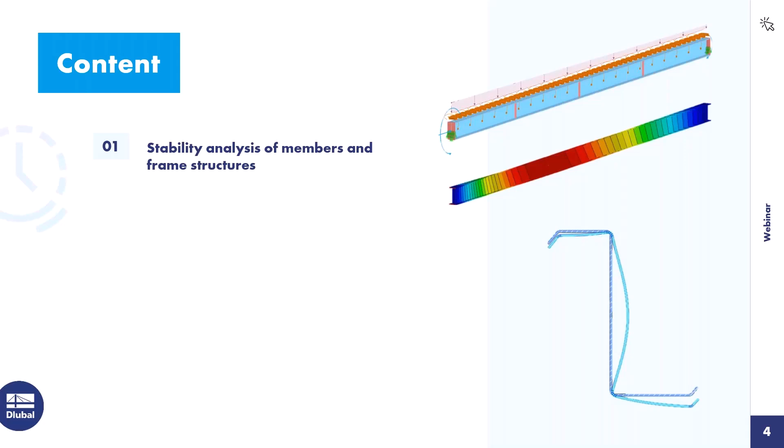First I want to focus on the stability analysis of members and frame structures. In the second step, I want to go to the stability analysis on a cross-section level using the finite strip method. Then I want to show you how the buckling analysis is integrated in the Steel Joints add-on. And lastly, I want to show you how we can use the Structure Stability add-on for troubleshooting of instabilities, how we can leverage it for that purpose.

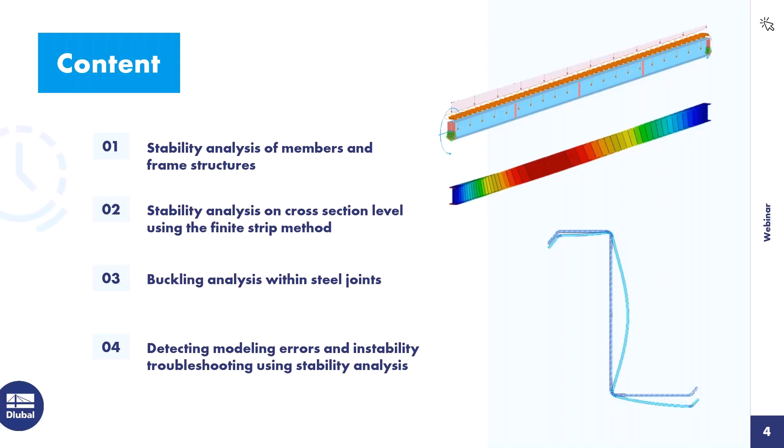Before we jump into the first model, I want to give you a brief introduction and explain at least a few points that are related to the stability analysis and how we perform it in RFEM 6. So what elements or structures are we taking care of with this analysis method? It's usually slender members and structures under compression that tend to become unstable, where the slenderness of a member or a structure is not only defined by its dimensions. The greater the length compared to the cross-sectional dimensions, the more slender and prone to instabilities it is, but it's also related to material properties.

So if I have a material that has high strength and low stiffness, then it's more likely that stability failure will be the critical design element as opposed to cross-sectional failure. And then lastly, the boundary conditions, of course, play a major role. If I have rotational restraints or lateral restraints for our member, it's not that likely to become unstable.

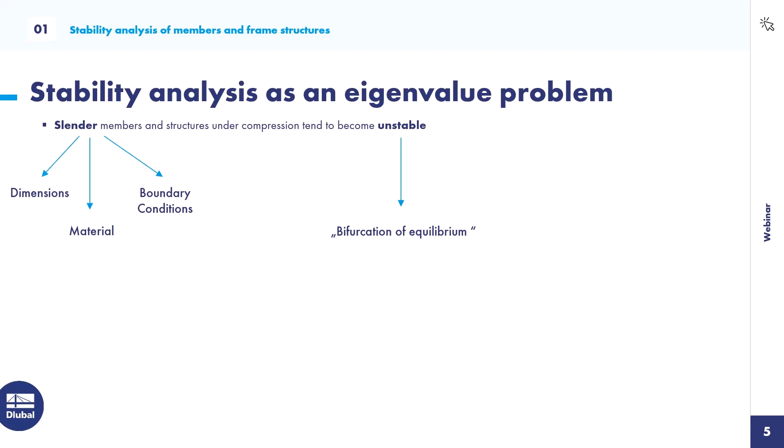And what do I mean with unstable? When we reach the unstable state, we have no clear state of equilibrium. We have instead a bifurcation of equilibrium, so there are multiple paths that the structure may follow. That's why this linear stability analysis is often referred to as a linear bifurcation analysis, or LBA. I might use that abbreviation along this webinar as well. And the critical load may also sometimes be named bifurcation load.

Using the FEM, the ideal bifurcation load can be determined solving a conventional eigenvalue problem. So we can set that up and solve that. In that context, what does ideal mean? It means for the stability analysis that we treat the structure as linear. So we assume a fully linear structure behavior and a perfect geometry. So the base geometry of our model is used in this stability analysis.

The eigenvalue problem in the general formulation has two symmetric matrices, A and B, the eigenvalues lambda and the respective eigenvectors x. And to solve for the unknown eigenvalues lambda, we have to set the first term of our formula to 0, and that's mostly done by calculating the determinant of this first part in the bracket and setting it to 0. And we have multiple numerical tools or solvers to do that determinant determination.

And in our specific case, in the stability analysis, our two symmetric matrices are represented by the linear stiffness matrix and the geometric stiffness matrix. The geometric stiffness matrix is dependent on the loading conditions. That's also why, before we can solve a stability analysis, we need to perform a structural analysis to determine the internal forces in the system and to determine the entries in the geometric stiffness matrix.

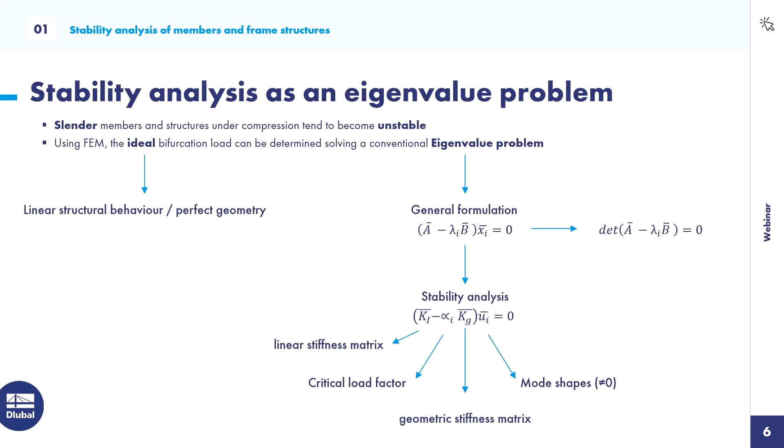We want to start with some fundamental solutions that are very well known amongst civil engineers. Euler already in the 18th century provided some simple analytic solutions for prismatic members under pure compression. They are well known as the Euler cases. I have listed the 4 fundamental cases here with the analytical formulas to calculate the bifurcation load or the critical load.

In the first step, I want to go into our program now and try to simulate an Euler case 2 and make a small comparison if we can evaluate the correct critical load according to Euler and what else we can get from our structural stability analysis. So let's jump into the program. And as I said, I have prepared some smaller models for you. The first one is this simple Euler case.

I have an HEB 300 beam with a length of 5 meters, and I applied a unit load of 1 kilonewton that sets the member under compression. In order to perform a stability analysis with our add-on structural stability, I need to first activate it, and I can find it in the base data of the model. I activate the respective add-on here, which you can find under analysis add-ons, click OK.

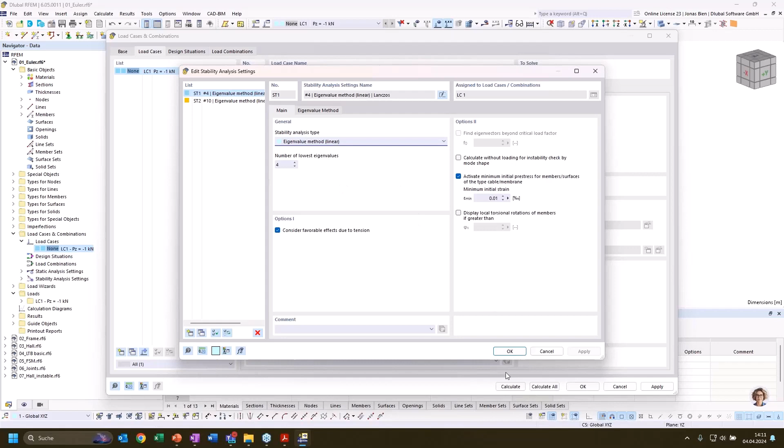And then we have these multiple solver variants to solve the determinant of our eigenvalue problem. But the default solver should mostly suit us for this problem. There might be cases where you have subsystems that are not connected to each other. Then this default solver will throw an error and suggest another solver variant.

But with these default settings, I can just run the load case, and now the first thing the program is doing is that it solves the static analysis, and then it solves the stability analysis. And when I have performed the stability analysis, I not only get the results for the static analysis, but I can also switch to the stability analysis results by this drop-down menu here.

Okay, so what do we see here? First of all, we get a drop-down menu here in the upper left corner, and also in the table we can see that we have these 4 mode shapes calculated with a respective critical load factor.

This represents the factor which I can multiply the external load with until my system would collapse due to instability. So if I would increase the unit load of 1 kilonewton up here up to 7,035 kilonewton and run a second order analysis, my system would become unstable and I would get an error message telling me that. So I can read these critical load factors here.

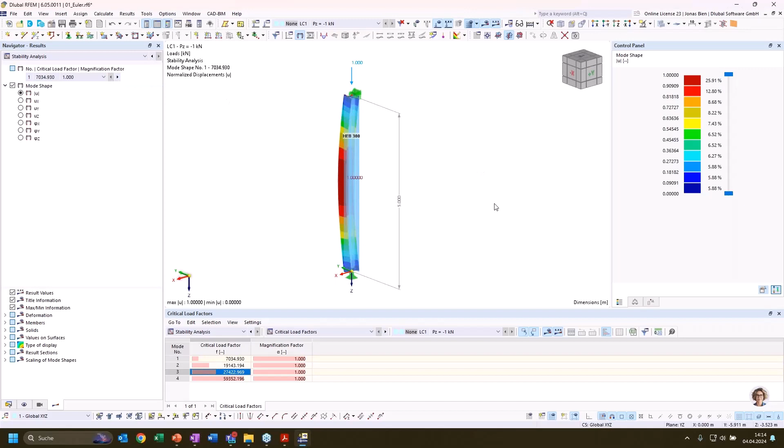Okay, so we can go through the 4 eigenmodes here by clicking the table entries, or also go through the entries in the drop-down menu. And we can see the first eigenmode that is presented to us would resemble buckling of our I-beam around its weak axis. And it's doing that in a symmetric way. We have a simply supported beam here, so that looks as expected.

Then the second mode shape would be buckling around the strong axis. And the third and fourth eigenmode are some multi-wave eigenmodes for buckling around the weak axis. These are mostly not very interesting for us, so usually only the mode shape with the lowest critical load factor is of interest for us.

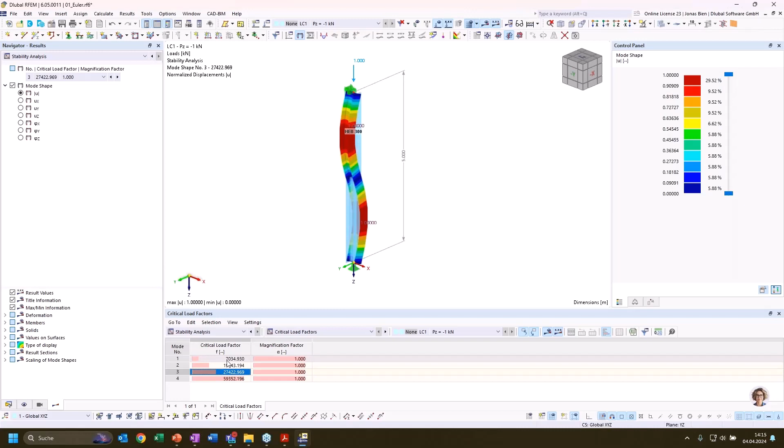And I want to now compare the critical load factor that we have calculated here with the critical ideal Euler load that we have for our Euler case 2. Just so that you remember, we could calculate it just using this formula, pi to the power of 2 times the Young's modulus times the moment of inertia of our section, divided by the effective buckling length. In this case, it would be the length of our member times 1, to the power of 2.

And I could do that using my calculator, but then I would need to look up all the values for my section, the member length, the material properties, and so on. So I want to show you an alternative solution. We can also use the in-app console that we can open via the toolbar. And in here, I can reference all the objects that I have in my model.

For example, I could reference my material number 1 by typing this and then typing a dot, and then I see all the properties that I can ask this object for. For example, I would find the elastic modulus here, and if I press enter, then I get as an output the elastic modulus of our material number 1 in SI units. So that's important. And of course, I can do some more complex calculations here.

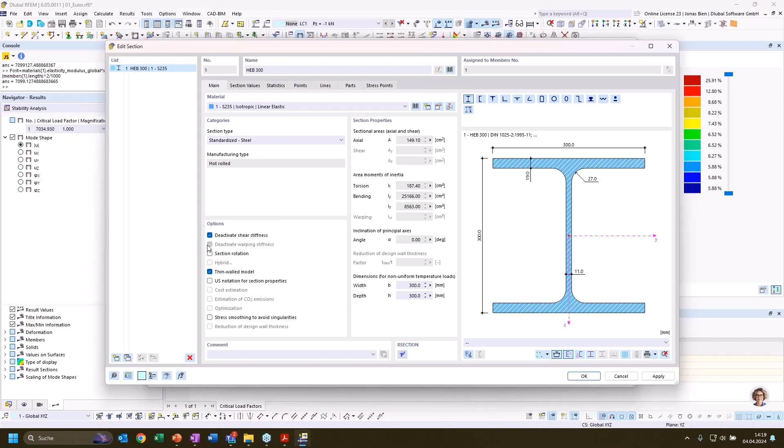And the difference comes from an effect that we take into account in our calculation with the finite element method, which is the shear stiffness of the section that was neglected by Euler.

So if we want to compare values, we can manually deactivate the shear stiffness for our section in RFEM and do the calculation again and see what our critical load factor would now be. And if I again go to the results, we now see that our critical load factor is much closer to the ideal Euler load.

It's really, it compares very, very well. So we could, of course, also calculate the critical load for buckling around the strong axis. We just need to swap the Z with a Y value, and we have the moment of inertia about the strong axis, and also this value is quite satisfying with regards to our result that we received from the structural stability add-on. So that compares quite well. We've, as we expected, met the results of the analytical formula.

Okay, now that that's set and we are confident that our solution here provides reasonable values, I want to show you another important result of our stability analysis when it comes to member results. Because it's often used for the later design of the column, if we, for example, would take a classic approach to design this steel column using an equivalent member method, we would need the effective buckling length. And we can use the structural stability add-on to calculate the effective buckling length for this equivalent member method.

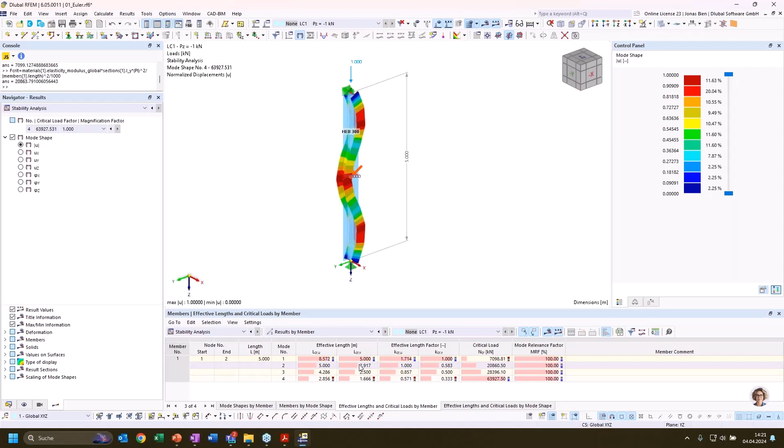Therefore, we just go to the results by member tab in the table and go to effective length and critical loads by member, or the last tab also has these effective length values included. And now we see for each mode shape, we have effective length given for both main directions. U represents the strong axis, while V represents the weak axis. It's like Y comes before Z and U comes before V. That's one way to keep it in mind. But now we have for the first mode shape two effective lengths for both axes.

And I want to explain what is done in the background. It's nothing else than taking the critical load formula from Euler for case number 2 and recomposing it or evaluating it for L, with beta being the buckling length coefficient and beta times the system length being L critical, so the critical buckling length. And when we know what our F critical is, so the critical buckling load, then we can evaluate the critical buckling length. And of course, when we divide it by the system length, we can evaluate the buckling length coefficient beta as well. And that's what is done here in the background.

The critical load of the member is just the normal force, or the actual force in the member, times the critical load factor. And from this F crit, our effective length is calculated, and then the effective length factor is calculated. And we can do that as well using our console. So we can also plug in this reassembled formula here as well. So I have L crit and I have here F crit. So that would be the parameter for our critical load.

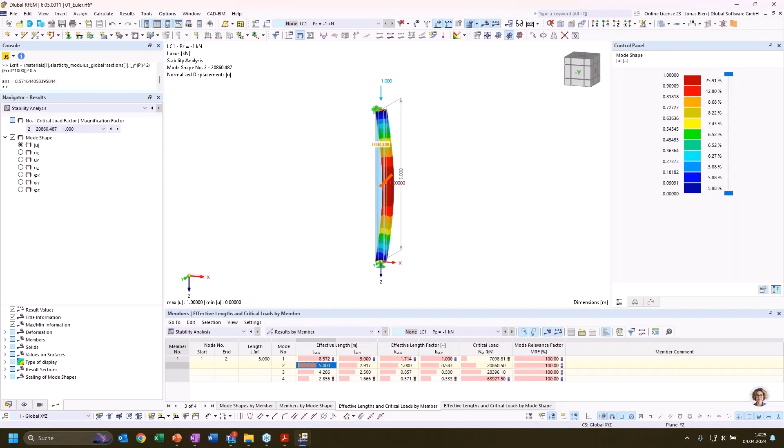So I can demonstrate that simply by again evaluating the L crit formula, but instead of taking the z moment of inertia for the weak axis, I put in the moment of inertia for the strong axis, and I receive this value of 8.57 meters, but it wouldn't correspond to the relevant buckling length of our system for buckling around the strong axis. So this is very important to keep in mind when using these effective lengths for the stability design.

Then one thing I want to show: we can directly import these buckling lengths into our design add-on. So if I want to design this column here with our steel design add-on, and I want to do it with the equivalent member method, I have to assign these effective lengths. And here I have the option to import the buckling length from the stability analysis.

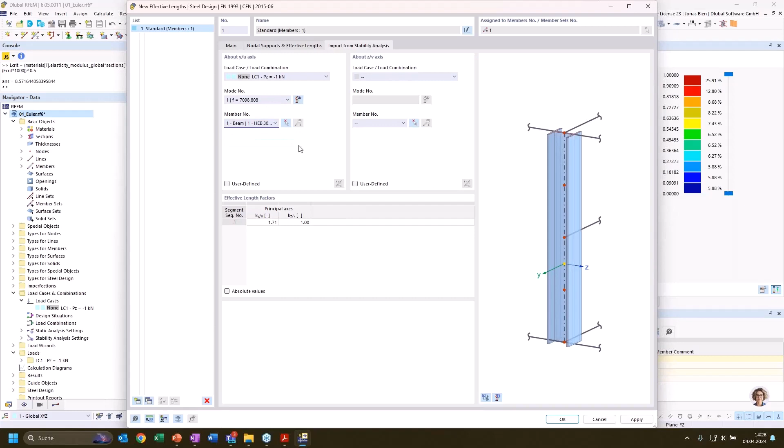And if I click this, we get another tab where I can enter the load case and the mode shape and the member number. And now it would take this buckling length coefficient from mode number 1 for beam number 1 and evaluate the effective buckling factor and use it for the design.

In this case, we have to take care that buckling around the strong axis is observed in mode shape number 2. So we would need to enter mode shape number 2 here, and mode shape number 1 would be for the buckling length coefficient for buckling around the weak axis. So that would fit and suit our expectations.

Of course, we can do that for more complex systems as well. We just have to keep in mind that when we have a more complex system and we change something, then the order of the mode shapes can also change. They are always sorted for the lowest eigenvalue or the lowest critical load factor. So the mode shape with the lowest critical load factor is always mode number 1.

And if we change something in our system, it can happen that this sorting changes, but these entries then need to be checked again because they don't know how to adapt to the changed model. So we would do that manually. That we need to always keep in mind. So sometimes it's just better to do the stability analysis and then manually put in the buckling length coefficients here, and we don't need to make any thoughts about it anymore.

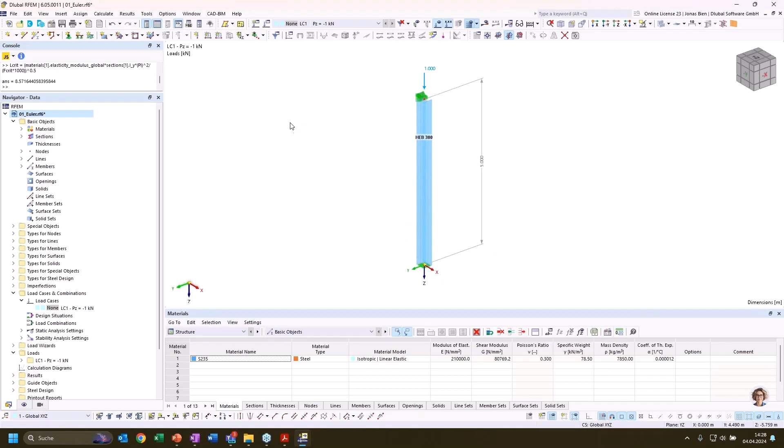All right, but that's not what I want to focus on now. I want to show you instead how the buckling length coefficients change or adapt when I adjust the statical system. So when I, for example, take a rigid boundary condition at the bottom of this column, it should now calculate a lower buckling length coefficient because now the system resembles Euler case number 3. And we know that here we would expect a buckling length coefficient of 0.7.

And that's exactly what we get for the first mode shape for the weak axis and the second mode shape for the strong axis in this case. Then, for these cases, of course, why should I use my add-on here? Because these cases are known. I can just apply the Euler formula and calculate my buckling length.

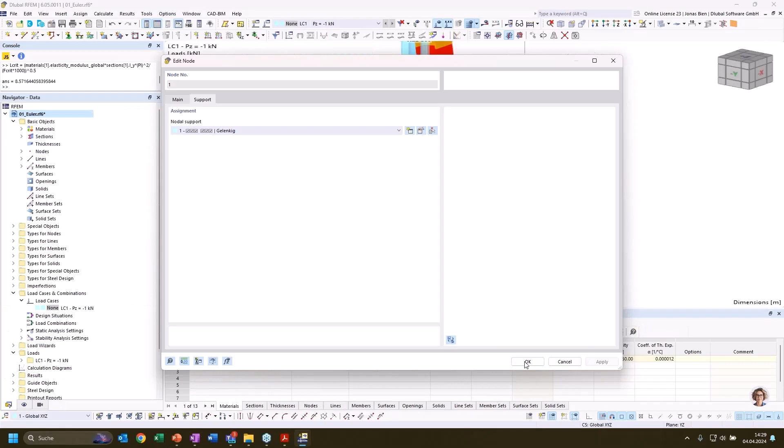But what if we have a certain spring stiffness here, which means that I'm with the stiffness somewhere between Euler case number 2 and Euler case number 3. And here it's not so obvious what the buckling length for our equivalent member check would be. Of course, we could look into textbooks that have these cases covered, but also here we can use the structure stability analysis to evaluate the effective buckling length factor. And as we expected, it is between 1 and 0.7.

So everything's set. Because it's a linear analysis, it is interesting what the program does with nonlinearities. So, for example, if I apply some kind of nonlinear boundary conditions here, which at first glance don't look that nonlinear, because in this case I want to apply a stiffness diagram where I have the stiffness of our spring at the column bottom in relation to the vertical load, but as you can see, it should be constant, and no matter what the vertical load in the column is, the spring constant should always be constant.

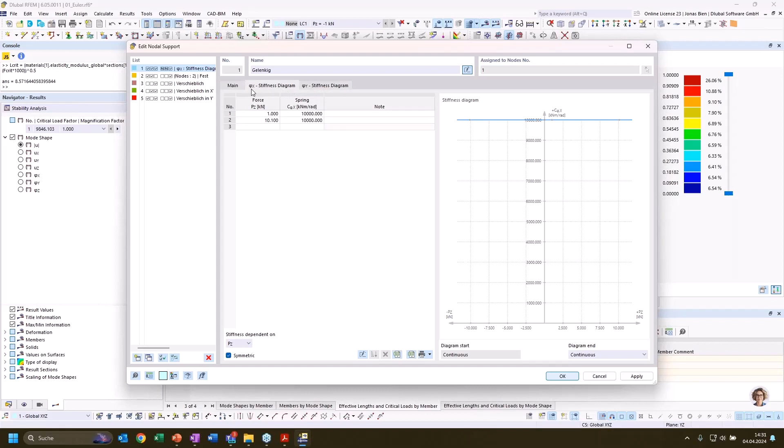So it doesn't look nonlinear at first glance, but we have to take into consideration that all these nonlinearities are ignored in the structural stability analysis. So I want to just demonstrate this. Although we have set this nonlinear spring stiffness at the bottom, we get as a result Euler case 2, where a pure hinge is assumed at the bottom. So when it comes to the supports, only these entries are taken into consideration for the structural stability analysis.

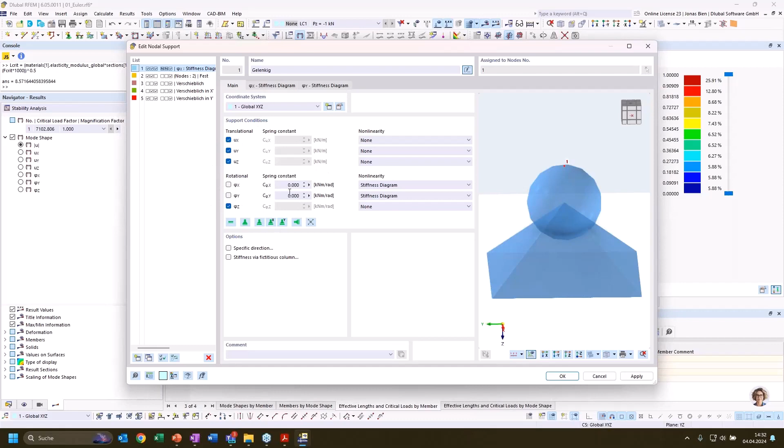All right. Of course, when we are working with other nonlinear elements such as tension rods or buckling members, then these are taken into consideration or not according to their state in the static analysis. So if we have a tension member that is under tension, it will be taken into consideration in the structural stability analysis as well, and vice versa.

Okay, then one last thing to finish this simple example here. Let's delete this nonlinearity and see what happens if we divide this member in half.

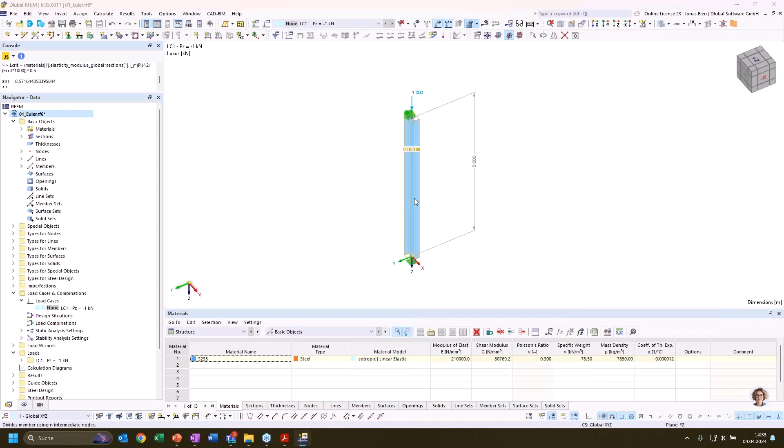I just introduce an intermediate node and divide this one column into 2 separate members, and again run the structural stability analysis.

So now we have two members, but the effective length for each member is still 5 meters, and that's what is expected when we again look at the formula for the calculation of our critical buckling length, because the Young's modulus, or the moment of inertia, they have not changed, and also the critical load factor has not changed.

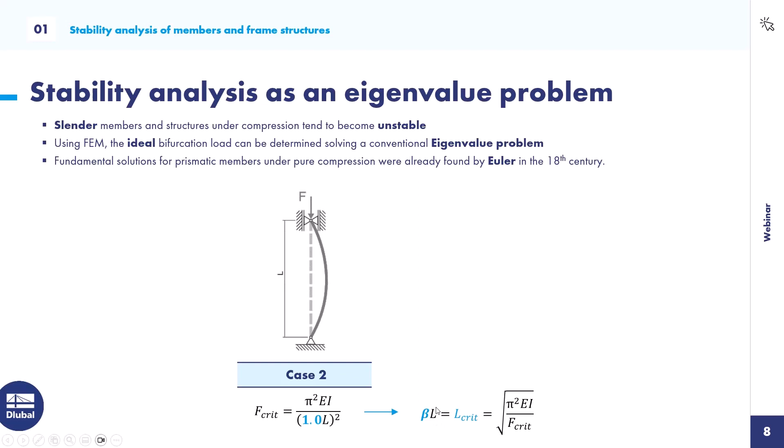The only thing that changed is our reference length L for the member. It's divided in half, and that is only visible in the buckling length coefficient, which is now 2 instead of 1 for each of the members. So we could still use this effective length factor for the stability design within steel design, or some design add-on. It would still be valid.

Okay, now let's increase the complexity a bit. So what if we have more than one member in our model? In this case, we have a 2D model of a 2-hinged frame with an additional column number 5, that is just connected to this 2-hinged frame by a truss member.

So this is basically a simply supported column, just as we have seen it before, which leans toward this 2-hinged frame, or is supported by the 2-hinged frame at the column head. All 3 columns, member number 1, 3, and 5, are loaded with a load of 1000 kilonewton in compression.

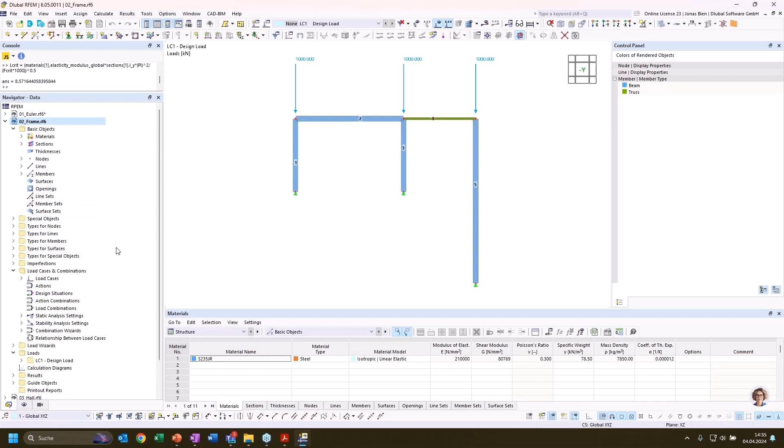Now let's perform a stability analysis for this load case as well. It should be all set for this analysis, same settings as we have used them before for the Euler case. And accordingly, we also get 4 mode shapes for our structure.

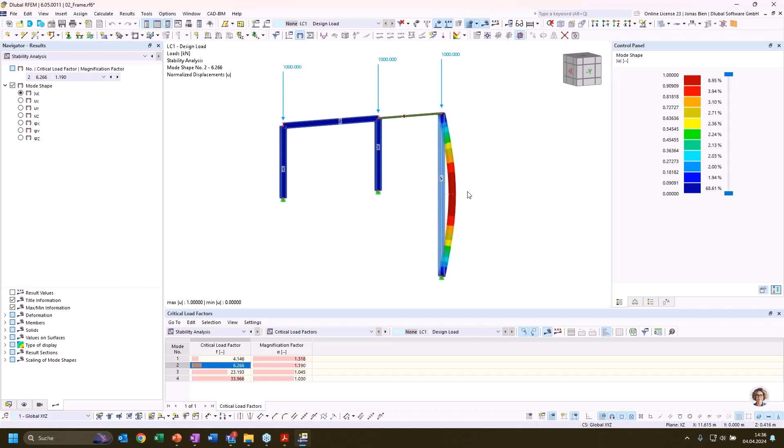I want to quickly browse through these mode shapes together with you. So the first one is some asymmetric lateral deformation of the 2-hinged frame, and also this connected pinned column is also moving with the 2-hinged frame. Then the second mode shape would represent buckling of the longer column with the pin supports around the strong axis. The rest of the structure does not seem to have any deformation.

And the third would also be a higher mode of this pinned member number 5. And mode shape number 4 would resemble a symmetric buckling mode of the 2-hinged frame without any participation of the simply supported column here at the side.

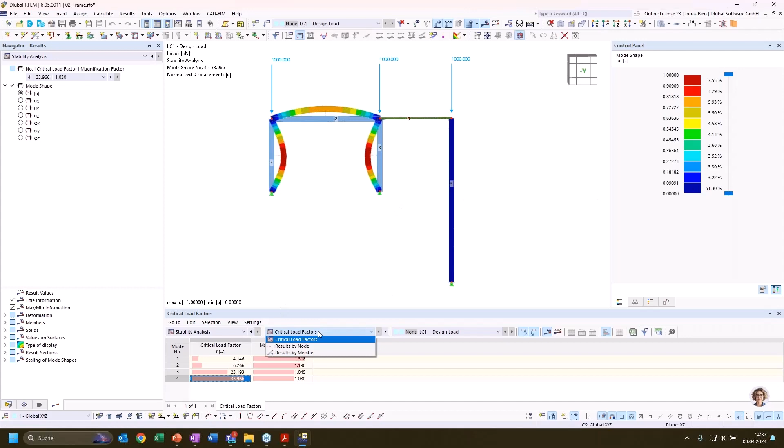So if we want to now extract the effective length, for example, for the columns of the 2-hinged frame, we can again go to the member results of the stability analysis and check the effective length by member, and I can then click on one of those members, and I will automatically be routed to the respective table entries.

And now in the first mode shape, as we have seen, this 2-hinged frame suffers from buckling around the strong axis, and we could read the effective length factor accordingly for the strong axis in this column. So we would get an effective buckling factor of 2.8, which is also in the realm of the expected results for such 2-hinged frames.

If we now neglect this simply supported column here at the side, we would expect some effective buckling factor higher than 2, and the exact value would be influenced by the stiffness of the girder and the columns, and of course the length and so on. Now with the additional column, it's also influenced by that. So that would be quite clear.

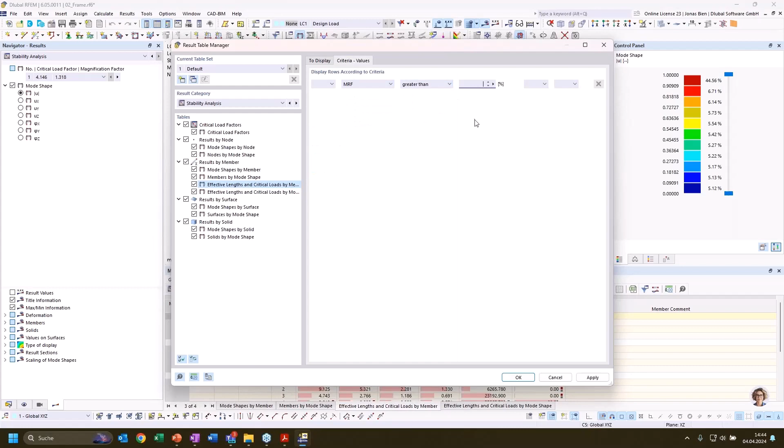For example, for the determination of effective length factors, I would go the other way around. When I'm interested in the relevant buckling factor for column number 1, I would go through the modes that I have calculated and only take into consideration the mode shapes that have a mode relevance factor that is significant, and read my buckling length factor from the mode that has the lowest critical load factor. In that case, I would definitely take the value of 2.8 for column number 1 and also for column number 3.

But I want to show you in the next step how we could also leverage this tool in a more realistic setting, or how to approach the buckling length determination in a more realistic model. So here we have an industrial hall. We have a lot of different load cases here that of course would give us probably about 100 or 200 load combinations. Of course, in some applications, we can have a lot more load combinations. And then the question is which load combination is most severe for buckling for a specific member.

And I have now, for this case, deliberately started with result combinations, because sometimes, for example, when I want to design bridges or so, I may have 10,000 load combinations, and it's not possible to calculate all 10,000 load combinations and assess them for stability. So what I would recommend, if you have too many result combinations to handle in one model - here it would still be feasible and no problem, but if you have additional load cases, that can be a problem.

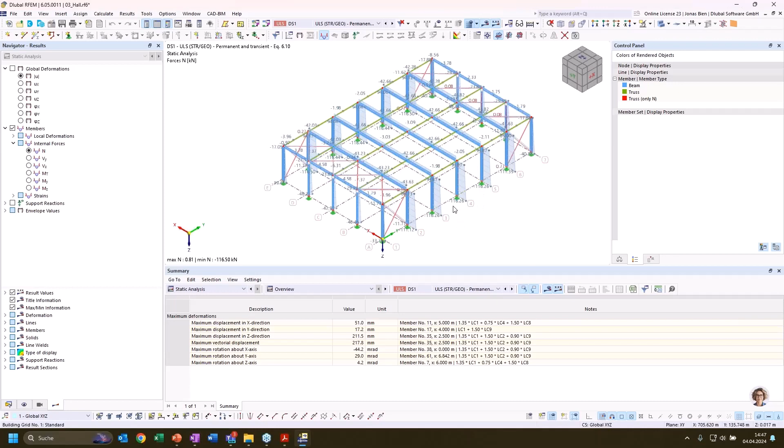I can find those if I go to the static analysis results for this design situation, go to results by members, internal forces, and stick to this middle column here. I click the column and get in this result combination all extreme internal forces for this member. So for example, I get the combination with the highest or lowest axial load, including the sign. The same is printed out for the highest shear force in Y direction, highest shear force in Z direction, lowest shear force, and so on. But since we're interested in buckling, I'd look at the combination that gives the highest compressive load, which is this one here with minus 116 kilonewton. In the last column, I'd have the loading or load combination that leads to this axial load.

Now from the result combination, I can just right-click this combination to generate a load combination from this table. For this load combination, which I feel could be the most relevant for buckling of our columns, I can now perform an eigenvalue analysis, a linear stability analysis, by just activating it here and calculating it. So now I specifically run the stability analysis for just this one load combination that I generated from the envelope.

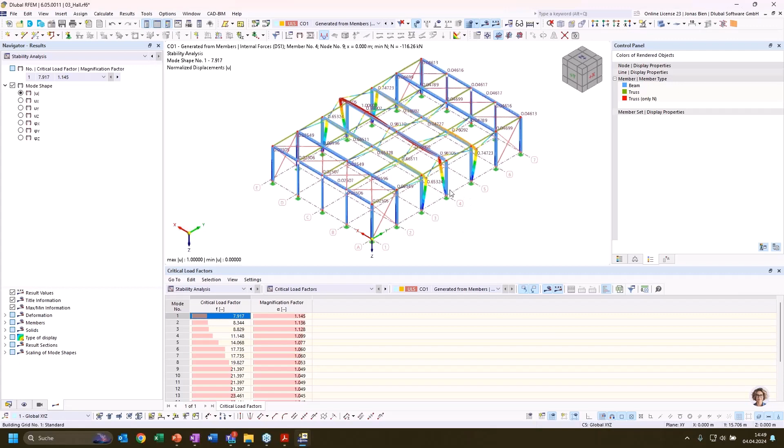Now the second question, after sorting out which design situation could be relevant: I'd have to figure out which mode shape is most relevant for determining my buckling length for this column. So again, I have 20 critical load factors and mode shapes, and I can browse through them. I see some involve deformation or buckling of the frame where this column is involved. Some are only isolated buckling of those columns, or some compressive member in the roof. These wouldn't really interest me.

In order to filter these out, I can again use the mode relevance factor. I go to the table effective length and critical length by members, click on my member number 4, and get the whole table. I get the mode relevance factor for all 20 mode shapes calculated, and I see that only in 2 of these mode shapes is my column member really participating. So these would be the only 2 mode shapes suitable for extracting the buckling length. I could, of course, apply the filter to make it more accessible.

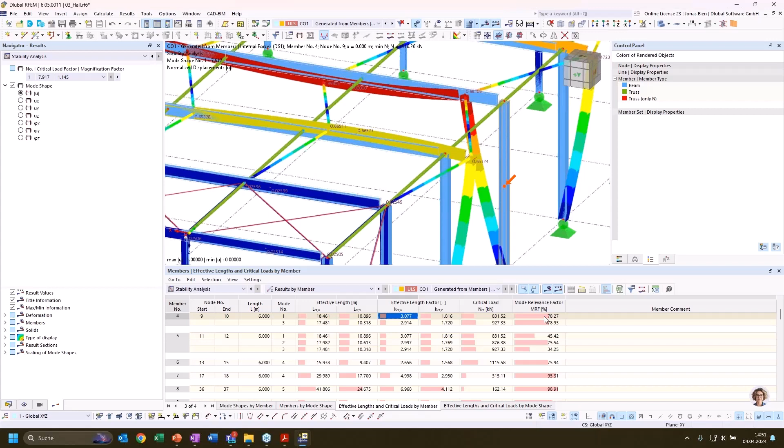Then I'd again follow the rule from the last smaller example: take the mode that has the lowest critical load with a significant mode relevance factor, and take the effective length factor for buckling around the strong axis from this mode shape. So this is how the mode relevance factor can help you assess the relevant mode shapes for a particular member design.

That's what I wanted to show you on this model. Now I want to take the next step and highlight something you may have noticed so far. We have only discussed flexural buckling of members, but especially in steel structures, other stability modes can also govern the stability design of these members, namely torsional buckling or flexural torsional or lateral torsional buckling. We can also take those into consideration with our structural stability add-on, but we need to activate warping torsion in order to detect those stability modes.

I want to make another small example where we investigate the lateral torsional buckling of a simple system, where again, as in the first Euler case, we know the exact solution, and I want to first compare the values we get from RFEM with the analytical value. So in order to perform a structural stability analysis where we can also consider lateral torsional buckling, we would, in addition to the structural stability add-on, also require the torsional warping add-on.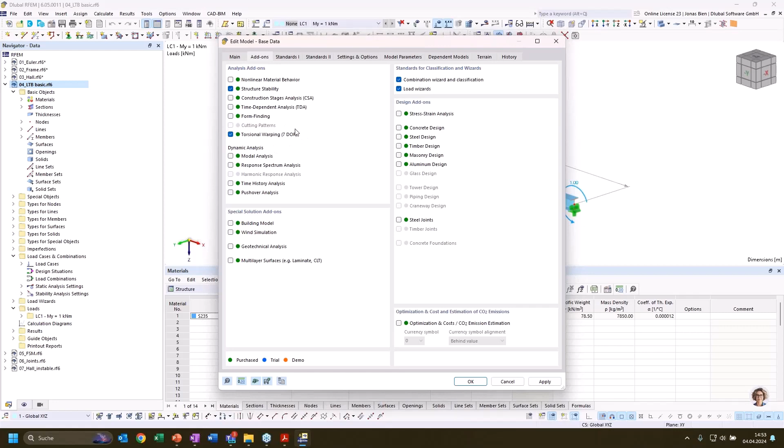And as soon as we activate the 7th degree of freedom, this would be directly included in the stability analysis, or would be taken into account. And I have now this simply supported member here, it's an HEB 300 again, with a length of 10 meters and a constant bending moment.

I could again run the stability analysis, and now we wouldn't get any flexural buckling modes for this member at all because we have no compression in it, but I didn't activate the structural stability analysis for this particular load case, so I will just do that. And now we should get a lateral torsional buckling mode.

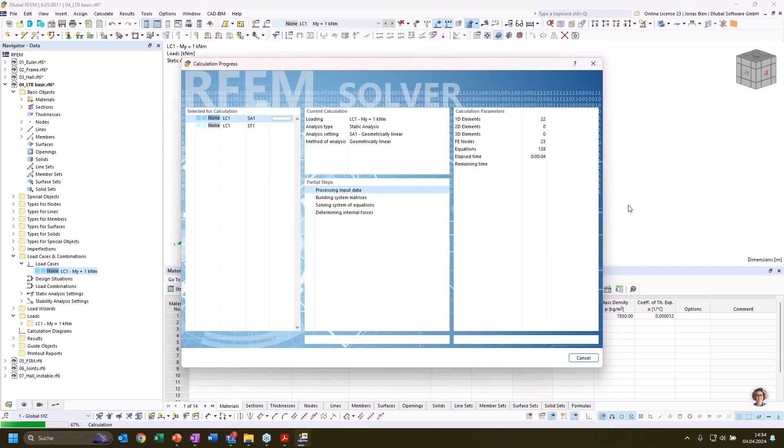When we switch to the results of the stability analysis, we can now see very clearly this characteristic deformation of our member. It tilts and at the same time moves in the direction of the weak axis. And again, we get a critical load factor. And this one we can compare with the analytical solution.

For this simple system, an analytical solution can be easily found in the textbooks. It was once also written down in some of the codes, for example, in the old German steel construction code DIN 18800. I think in some national annexes of the Eurocode 3, this formula is also given.

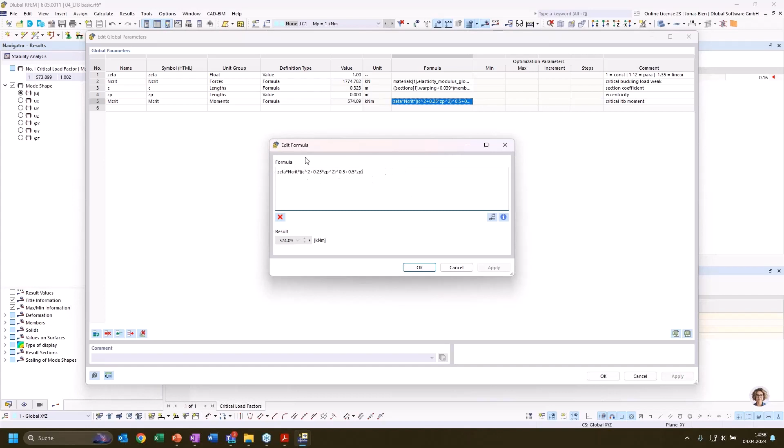But for our convenience, I already plugged this formula to calculate the critical bending moment for lateral torsional buckling into our global parameters. So instead of just using the console and typing in my commands to evaluate certain parameters or values, I can also use global formulas and global parameters to calculate something. For example, I have now created a formula for the evaluation of Mcrit, and we can look at what goes into it. Maybe this looks familiar to you.

So here we have a parameter that describes the moment distribution, which is zeta. It's 1 in this simple case with uniform bending. Then we have the elastic buckling load, Ncrit, the one that we already assessed in the first example. Then we have some parameter C that takes into account the warping and torsional stiffness of our section. And we have zP, which describes the eccentricity of the loading, which is in this case not important. And what we get from this formula is a critical bending moment of 574 kilonewton meter.

We could also use the console again to evaluate this. All the global parameters that we have stored, we can call here in our console. In this case, it's again written in SI units, so I would need to divide it by 1000 to get to kilonewton meter. And this is very close to the value that we evaluated with the Structure Stability add-on. So it works again quite well.

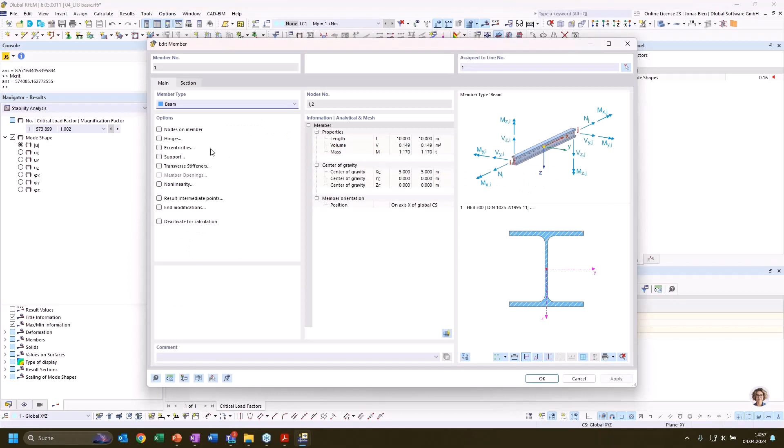But of course, as in the Euler case, we can use our Structure Stability add-on to investigate much more complex cases. For example, we could add a member support. So I go to the member and add a support, and then I get this tab where I can enter a member support. I could manually put in some rotational restraint. I could even apply an eccentricity of this member restraint, for example, a rotational restraint at the top of the flange.

And we can now also take into consideration shear panels and rotational restraints in the global analysis. They are entered as fictitious stiffness. You may know them from steel design, aluminum design or timber design, where you always had access to those restraints, but they were only considered in the design of the member, in the design add-on. But we can now use them in the global structural stability analysis as well.

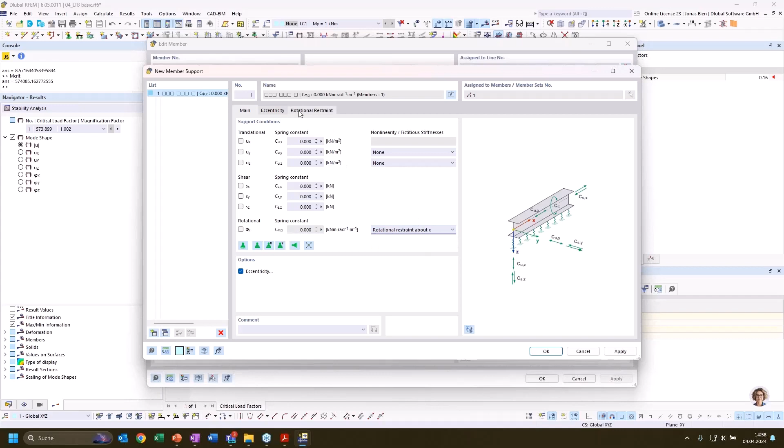So I could, for example, define a rotational restraint. For example, I want to consider some kind of sheeting that I have on top of my girder. I will now just take some more or less random settings, some sheeting just to get some stiffness. Of course, these values were accessible all the time, but now we can also use the stiffness that we define here in this global structural analysis.

And one thing that is also new, and I want to highlight to you, is that for the spring stiffness of the connection between the trapezoidal sheeting and our member, and also for the load introduced to the sheeting, we can now set load dependent values.

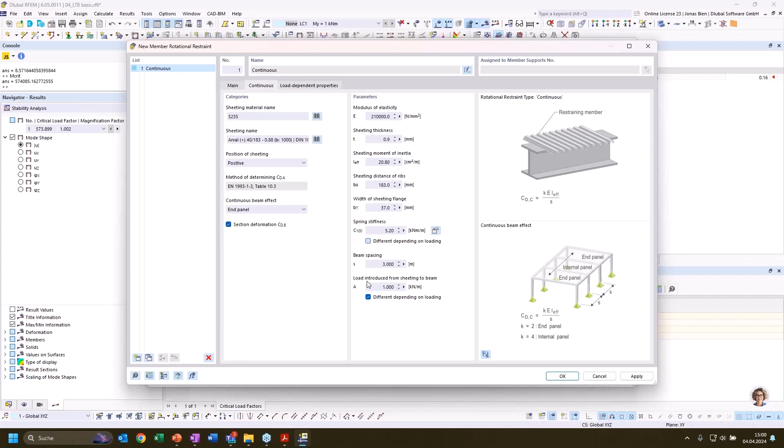So if we click these options here, we could, if we had multiple load combinations that we would like to investigate, set different values for different load combinations, for example, distinguish between situations where we have suction on the roof and compression or pressure on the trapezoidal sheeting. We could take this into account by adding different values here in the table. This is also quite new since a few months.

And with this rotational restraint, I could also add a shear panel. And by the way, we are now able to not only add a shear panel in Y direction, we can also add a shear panel in Z direction, which could be interesting for columns or girders that are for some reason rotated by 90 degrees. So we can also use that now since some weeks.

And we have now calculated directly some stiffness for the rotational restraint from our trapezoidal sheeting, and we could consider this in the stability analysis. But by default, these fictitious stiffnesses, so the trapezoidal sheeting in this case, would only be accounted for in the design add-on.

So if we activate the steel design add-on, in this case, because we have a steel girder, and I now activate the lateral torsional buckling check according to the equivalent member method, we already see here that the default way of calculating the critical moment value is using the eigenvalue method. So the method that we also use in this structure stability add-on.

Of course, we need to set some boundary conditions here for the design add-on. But in our case, it's quite simple. We have simple support with fork supports, and that's what the default settings are also for the effective length settings. So that should be all right. Okay, in order to perform the steel design, we also need a design situation and some load combination inside this design situation. I will just add a load combination with 1 times the first load case.

And if we now do the calculation, we are now running a static analysis, then the structural stability analysis of this member, and then the steel design analysis. Let's check the results and compare them. So first, in the stability analysis, it seems like nothing has changed. We still have a critical bending moment of 574 kilonewton meter.

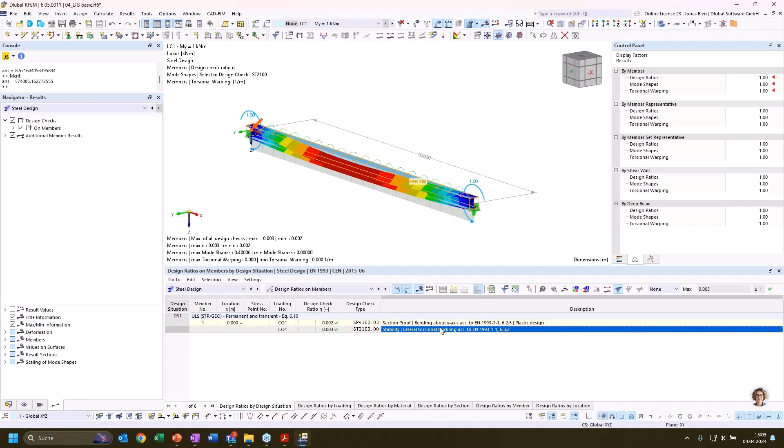But in the design add-on, let's check the result here. We have now the check for lateral torsional buckling here. We can also see what the relevant mode shape would look like if we click on this design details. And if we double click on the design details, we can also check what value for Mcrit is evaluated in the internal eigenvalue analysis.

And we see that now in the steel design add-on, the rotational restraint on top seems to be already taken into consideration, because we have a much higher critical moment in our steel design add-on, while in the structural stability analysis, the values stayed more or less the same. But we have now the option to take these fixture stiffnesses into account also in the structural stability and static analysis. And we can do that by adding a structure modification to this load case.

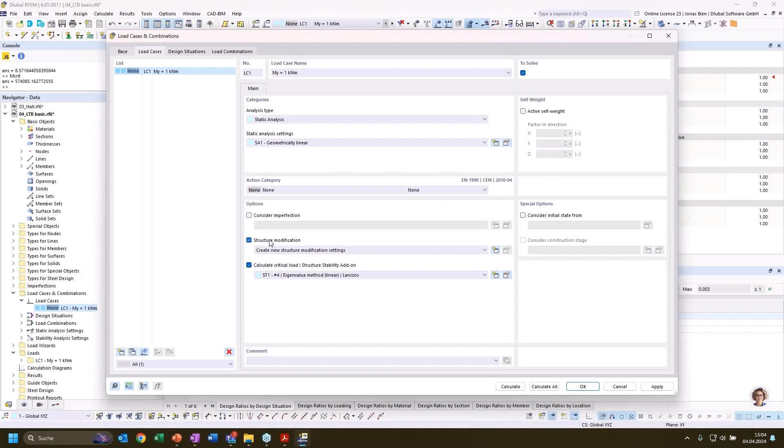And here we just need to activate the option to consider shear panels and rotational restraints also in static, stability, and modal analysis. So before, it was only possible to take these shear panels and rotational restraints into account in the design, so in the LTB design within the design add-ons. But now we also moved this possibility to the global analysis,

because you may want to perform a lateral torsional check using a second order theory analysis with imperfections, and maybe you want to also have these rotational restraints be effective in this global analysis. So that's why we added this option through the structural modification.

What is also new is that you find these objects, so the member shear panels and the rotational restraints, now under types for members and not anymore under the types for the design add-on. In earlier releases, we had those two objects under, for example, the types for steel design or aluminium design or timber design. Now you find them under general objects for types of members.

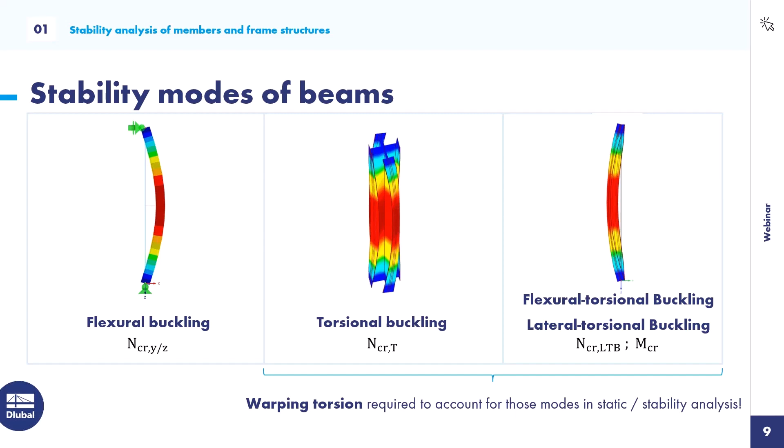And of course, if we are interested in local buckling of the cross section, we could extract from these beam models a shell model. That is quite easy in our software. You can just right click on a beam member and say I want to generate a surface model from this member, and then surfaces are directly generated with the correct thicknesses, just as they had the thickness for the member. For example, the top flange would already have a thickness of 19 millimeters that would correspond to the HEB section.

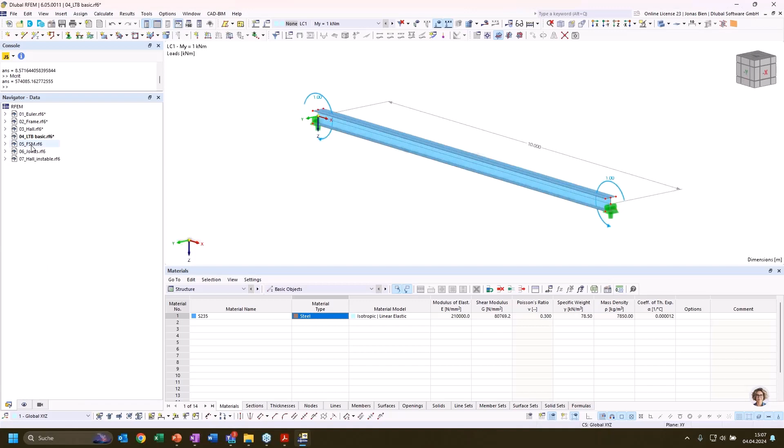And now we could mesh this in a very fine sense to do stability analysis for this shell model. By doing so, we could also analyze local buckling modes of the section. And because it's not very interesting to do it with a hot rolled section that is in this case not susceptible to those local failure modes, I want to do it with a cold formed thin walled section.

So here I have prepared a fifth model where I have a parametric C section with a height of 200 millimeters, width of 75, and a wall thickness of 2 millimeters. So that would be a perfect example for a thin-walled, cold-formed section. And as I just have shown you, I have transferred my beam model into a shell model. I have meshed it very finely in order to get all the relevant local buckling modes.

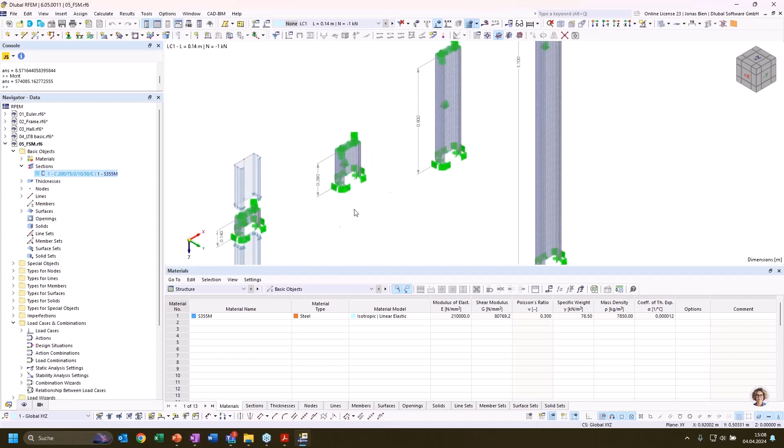And then I have modeled 4 different members with different length. So I have a very short element of this C section. Then I have one which has double the length, one with a length of 90 centimeters, and a very long C member as a shell model. And I have applied some boundary conditions that avoid any unwanted singularities in the model. And then I have applied in 4 different load cases a unity load to the top and the bottom of these column stubs.

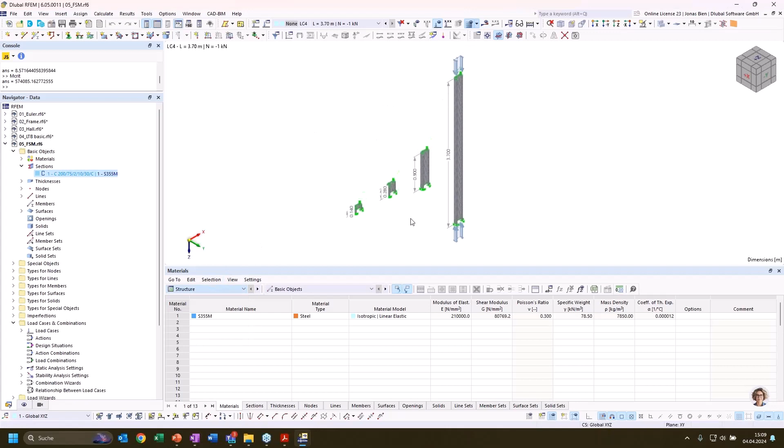So as in the first step, that should resemble the Euler case. So I have a beam with a certain length and I apply uniform pressure on it. But in this case, of course, I have a monosymmetric cross section, which is very thin. So let's check out the results. What do I get from such a stability analysis? Now in this case, I have performed a stability analysis of the shell model.

And if we look for the results of the longest segment here with this 3.7 meter long C section, I have the first critical load factor at 84 kilonewton, and I can see that the mode shape resembles flexural torsional buckling in this case. So I don't see any local buckling of the different cross-sectional elements, but the whole section is deforming at midspan.

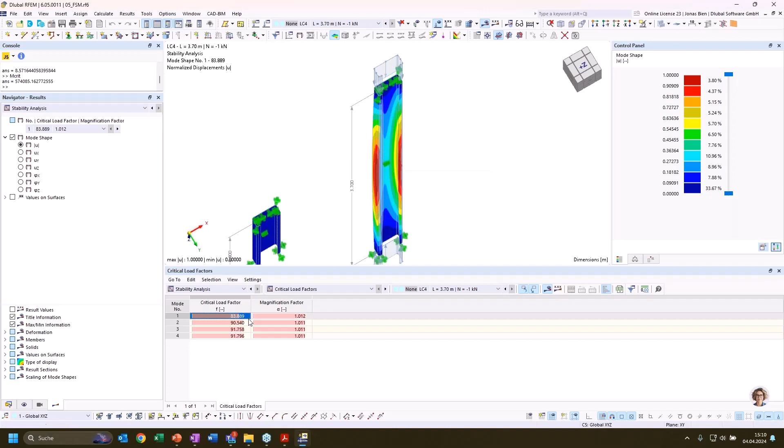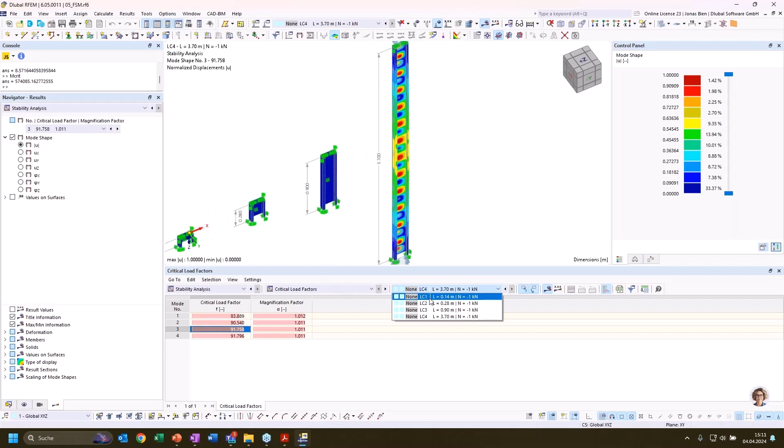If I check the second mode shape, I have buckling about the weak axis. Third mode shape now would be one that involves also local buckling of the web. And this we can only see with such a refined shell model. Now what happens if we take a shorter column? Now we see that the critical load factor or the critical mode shape is governed by local buckling. So in this case, global buckling, like flexural torsional buckling or flexural buckling, wouldn't be the major issue, but stability failure would be more related to local buckling of the web.

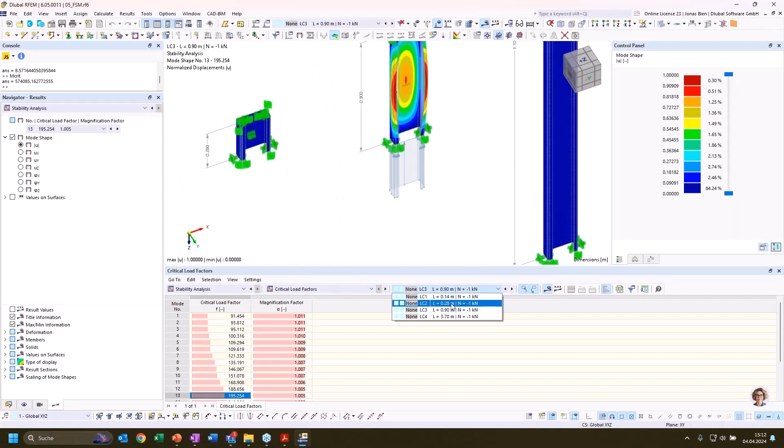And I can go through this and I find several mode shapes where especially my web buckles in different configurations. And then in mode shape number 13, I find also a mode shape which is particularly interesting for cold-formed members, and that is distortional buckling. So in this case, not separate elements of the cross-section deform, but the whole cross-section bends up, so to say. So if we look at the midsection, the lips are deforming horizontally, and at the same time, the web is also deforming. And then finally, for the very short configurations, I again find the local buckling modes.

And what is also important to note is that the critical load factor is not changing significantly. So the most relevant critical load factor is not changing a lot when we compare the three smaller column segments here. We are always around a factor of 90.

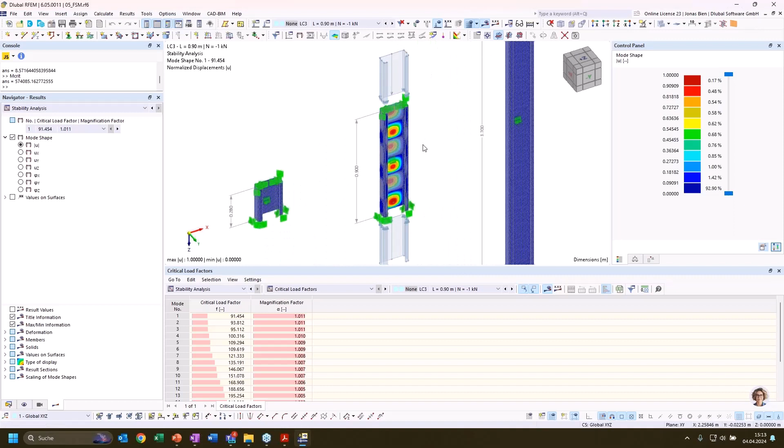But of course, this type of analysis comes with a drawback. It's quite cumbersome to prepare this kind of model. We see that we require quite a fine mesh to get valuable results, and calculation in this case would take 1 or 2 minutes for these 4 cases here, because these are quite a lot of elements and degrees of freedom that we need to solve.

But we have also another alternative option to investigate such failure or local instability modes on the cross-section level. And this is kind of hidden in the edit sections dialog. That's why I want to show you that and highlight that we have this feature.

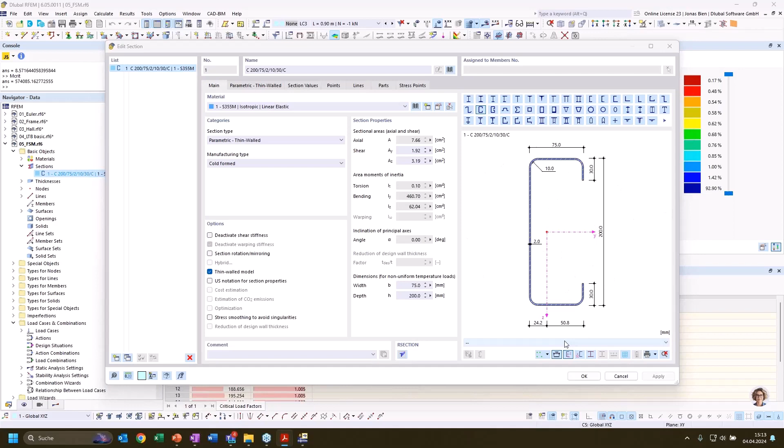So for a particular section, we have on the right side this preview of the section with all the dimensions and so on. And below that, we have a drop-down menu where we can find a lot of interesting features and functions of this cross-section. For example, unit stresses under certain loads.

But right at the bottom, we also have the possibility to investigate the buckling shape of this section for some unit loads, for example, for a 1 kilonewton compressive load or for 1 kilonewton meter bending moment around the strong axis and so on. And if we click on that option, I can see that I get a diagram as a result. And what I get here is the so-called signature curve for our cross-section.

And it gives the relationship between the critical bifurcation factor for this unit load, 1 kilonewton compression, in relation to the member length. So we can see that in the start, we have a very small member length. In this case, for example, the first minimum is evaluated for a member length of 14 centimeters, which would be the smallest column stub that we have just investigated with our shell model.

And when we look at the respective bifurcation factor, we see that it's around 90, which does very well correspond to the linear bifurcation load that we have received from the stability analysis on the global level in the shell model. On the right side, we can also see how the cross-section deformation would look like in this particular mode shape.

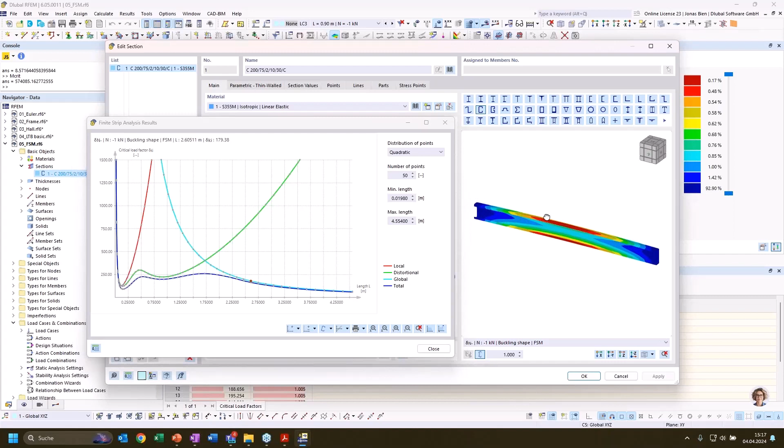And one newly added feature is that we can not only display the results of the cross-section, but we can also directly investigate the deformation of our member with the respective length in 3D. And this is of course also refreshed: if I click one of those points on our signature curve, I get the respective deformation of a member of that particular length.

And what happens in the background? As soon as I start this feature here, in the background, the finite strip method is employed, and I want to show you what that means. Because as we have already discussed, we can do stability analysis of beams, which has the advantage that we have very few degrees of freedom. Or we could also investigate stability of members with our shell model. But here we have a lot of degrees of freedom, and solution takes quite a while.

And the finite strip method is some kind of intermediate accuracy solution where we divide the cross-section into multiple strips, and only one strip or element is used over the length of this member. And when we activate the finite strip method in the edit section dialog, a lot of these FSM members are generated, the eigenvalue analysis is performed, the eigen shape is stored, and also the critical bifurcation load is stored. And this happens on the go.

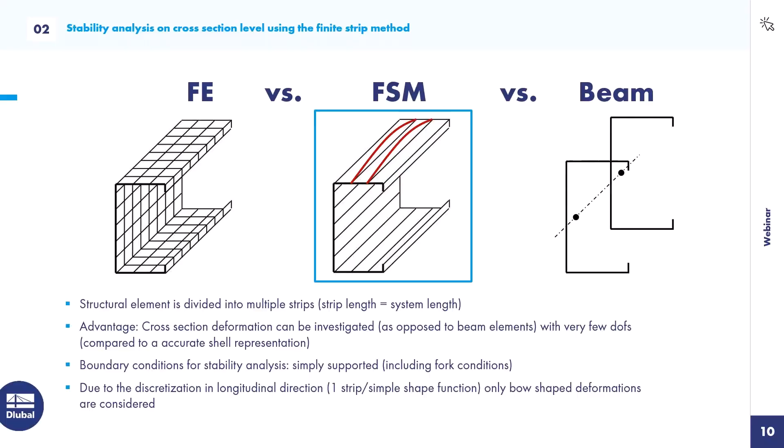So if we click it in the edit section dialog, it's done, and it finishes about 50 analyses within less than 1 second. So this is quite a nice advantage of this analysis method. One drawback, if we compare it with the shell element, is that at the moment we can only investigate specific boundary conditions. So the results are only valid for a simply supported beam that is assumed in the background.

We can only assess results for unit loads at the moment, and we cannot account for any local load introduction. Also, we assume that the behavior over the length of the member and also the loading conditions are constant. And also because we only use one strip over the length of this element to represent this member, we can only investigate failure modes that are bow-shaped, or eigenmodes that are bow-shaped, so that have only one half-wave deformation.

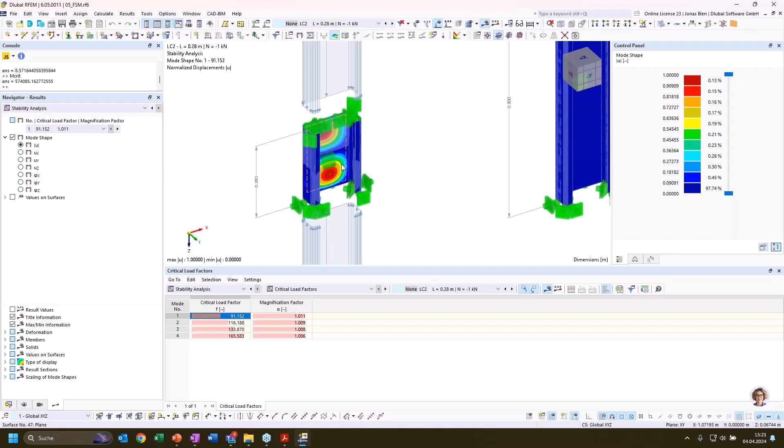But as we have seen in our shell model, for our second model here with a length of 28 centimeters, we have also local buckling as decisive failure mode, and we have two buckles over the length of the section, and this cannot be represented or investigated with the finite strip method as we have it implemented into our program.

And that's why we should keep in mind that we not only have one curve for this local buckling with the bow-shaped deformation, but we have also a similar curve that has its minimum at a multiple of the first critical member length. Here, the first critical member length was 14 centimeters, but at 28 centimeters, we have a similar bifurcation load, just that we have a multi-wave local buckling in the web.

And we have multiple of these curves, so we should take the minimum bifurcation load for local buckling or also for distortional buckling as a straight line in this diagram. And if we compare this then with the signature curve, we get a feeling at what member length global buckling gets relevant again before we have local stability failure.

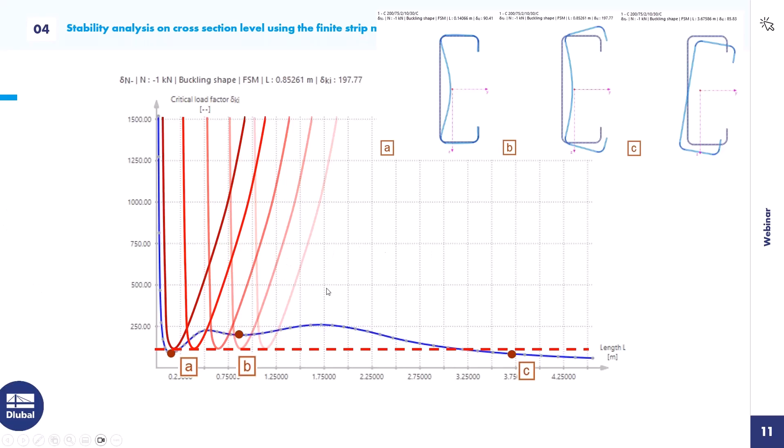This is not only a nice tool to get a feeling for which stability phenomenon can be an issue for my cross section. So depending on the member length that I'm modeling, I can directly see, okay, local buckling is not a big deal, and distortional buckling is not interesting for me. I'm in a realm where global buckling will govern the design. Or I could say, I'm at a length where local buckling and global buckling could happen at the same time, and I need to take into account some kind of interaction between these stability modes.

And it has also a practical use. For cold-formed design within our steel design add-on, we use the distortional buckling curve evaluated on the basis of this finite strip method to evaluate the effective sections of our cold-formed section. So we directly use the second minimum of this distortional buckling curve in the design of cold-formed members according to Eurocode 3 Part 1-3, and also for cold-formed design according to the American standard, the direct strength method. So it is already implemented in the cold-formed steel design.

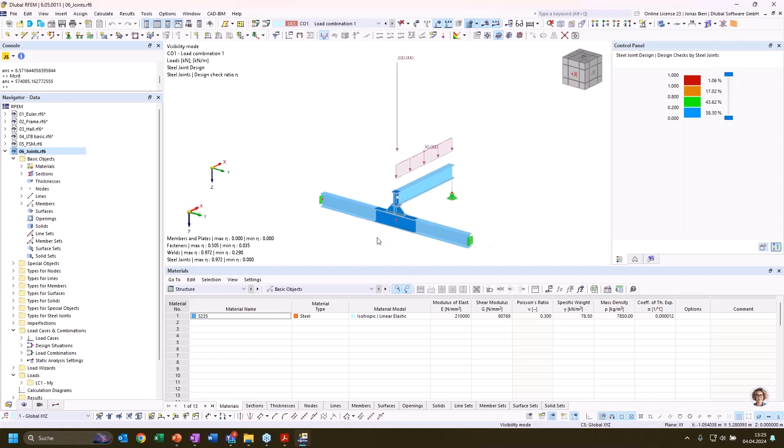All right, that's it for the second topic, the cross-sectional design. The two last topics will hopefully not take that much time to explain. I just want to mention as a side note that we also can perform the linear eigenvalue analysis within our steel joints design. To demonstrate this, I have here a relatively easy model where I have a connection between a secondary member to a main member. And the secondary member is loaded.

I can not only do the usual steel joints design checks, but I can also perform a buckling analysis. I first want to show you where I can activate it. You can find that in the ultimate configuration for the steel joint, in the first point, perform buckling analysis. If you have activated it, then not only the resistance of the components is calculated, but also a linear eigenvalue analysis is performed. And we can assess the results via the table. Here we see that we don't only have the result values for the stress strain analysis, but also for the buckling analysis.

In this table, again, we get the critical load factor for our 4 mode shapes that were calculated by default. And we can analyze the mode shape by clicking on one of those table entries and opening the steel joints deformation results button. Now I see the mode shape number 1 in this particular joint. I can browse through the different mode shapes by clicking the different table entries. And I can see that for this joint in the first mode shape, I would have some kind of web buckling under the load introduction here from the secondary beam.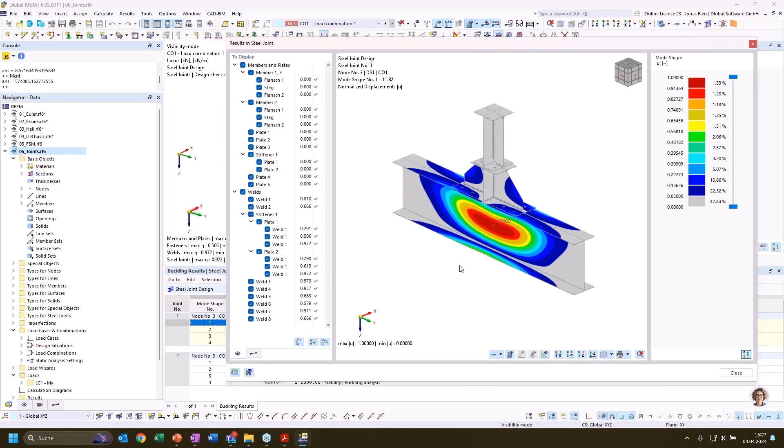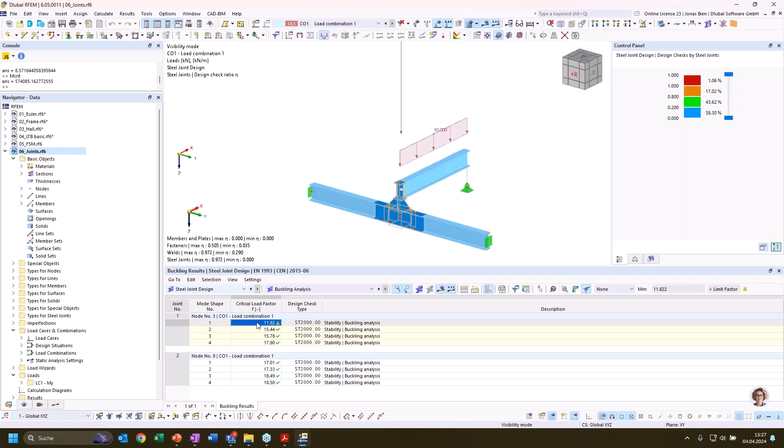I could take some measurements to avoid that, but I also need to take into account the critical load factor to judge how critical this mode shape is. We see that for the critical load factor of 11.8, we get this warning sign, which just means the calculated critical load factor is lower than the default limit value of 15. But that doesn't necessarily mean we have a problem here.

The default bifurcation factor limit is derived from Eurocode 3 part 1.1, which is more for member design, and this limit of 15 should be conservative for most cases. What I'd suggest is to really study the mode shapes we observe as a result of this buckling analysis, and see if we can extract limits for this critical load factor from the respective parts of the design codes.

In this case, as I said, we have some kind of web buckling under the concentrated load introduction here. So I would check chapter 6 of Eurocode 3 part 1.5, where web buckling under patch loading is treated, and see if I can derive limit values there.

If I know the correct limit value and want to improve the behavior, I can directly modify my joint. I have a second configuration of this specific connection, where I just added a stiffener in the main beam.

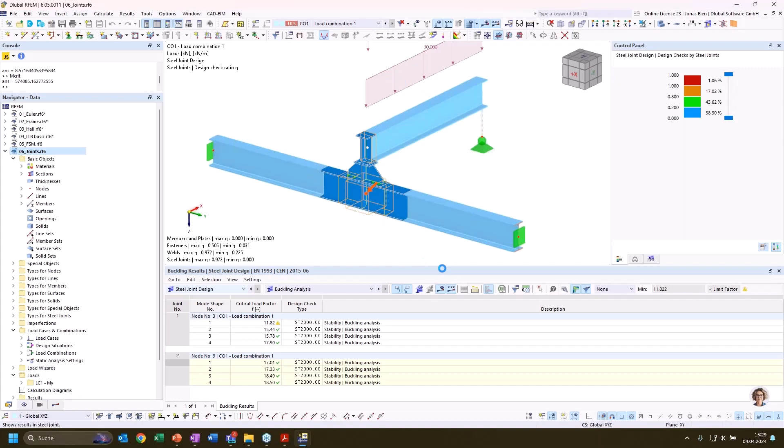We see that the critical load factor for this configuration has already increased from 11.8 to 17 just by adding stiffeners to the main member web. If I observe the first mode shape, I see that my buckling panel is now divided by this stiffener. So every change directly affects the results of this buckling analysis.

Okay, let's move to the last point. I promised to show you how we can use the structure stability add-on to troubleshoot when we have some instabilities within our model. I prepared another industrial hall, very similar to the third model, but here I reduced the number of load cases.

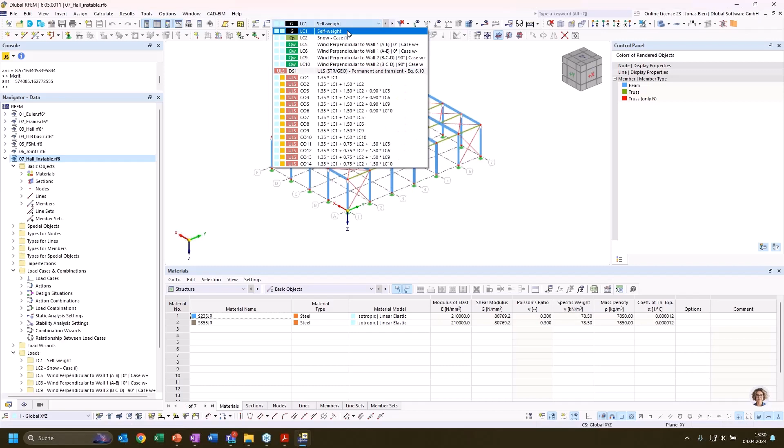I worked with load combinations and introduced some mistakes which lead to an unstable solution. So for example, I would have modeled all my structure, put in all my load cases, and now I'd like to press calculate, grab a coffee, and let the computer do the rest of the job.

But now, when trying to calculate the first load case, which is just the self-weight under first order theory, I get a warning message, and the program highlights that the stiffness matrix is singular. It also gives a hint where I could look for possible mistakes, but I can't really see anything wrong here.

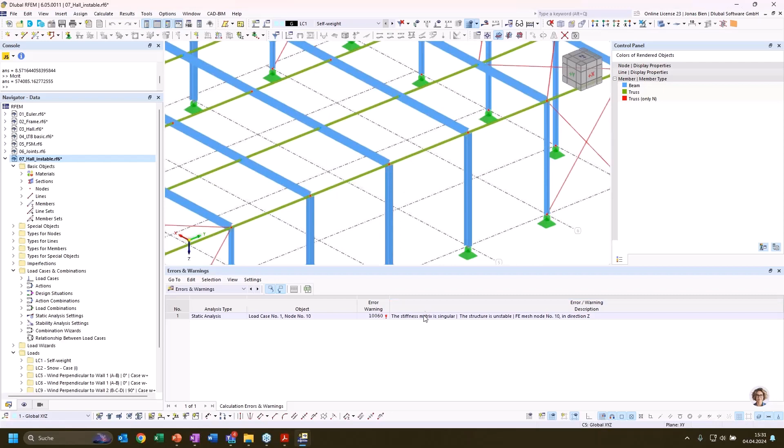I could now activate my structure stability add-on and conduct an eigenvalue analysis with a specific setting. In this case, when I want to check for instabilities, I can say it should calculate eigenvalues without loading for instability checks, so it looks for eigenvalues of 0 value and calculates the respective eigenvectors.

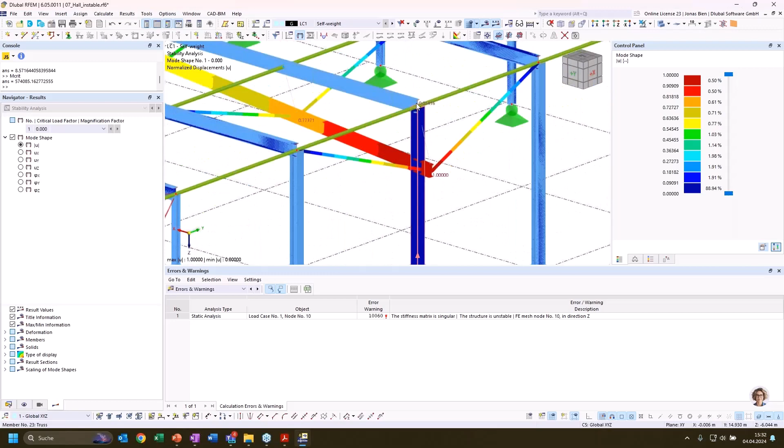What I see now is that the girder in axis number 4 is more or less falling down, as if it's not connected to the beam. When I zoom in, I see there are two separate nodes, and the column is not properly connected to the girder, which could be the reason for my instability.

So I quickly resolve this issue and try again to calculate load case number 1. Let's see if it works now. Again I get an error message, and again I can try to get additional information with my structure stability analysis.

When I click through the deformation results, I see that for the rotations around the global x-axis, something looks a bit off. I get very high deformation values, and it seems like the girder in the last frame freely rotates, which indicates it's not properly connected to the columns, or some degree of freedom is not restrained properly.

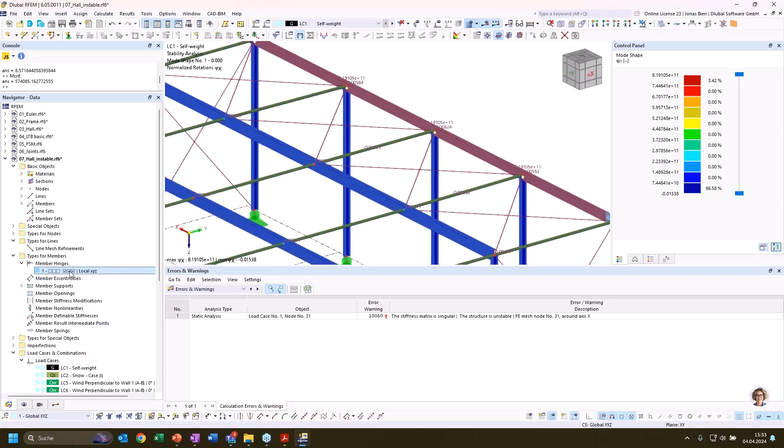If I look into the connection definition, I see I have a hinge on every column end, and I defined this hinge with rotations free in all 3 axes, which means this member can freely rotate at the top. Maybe that was a mistake, I wanted to establish frame action here, but accidentally applied the hinges to all my columns.

Now that I found this mistake, I can remove those hinges in the frame corners, and check a third time if the solution runs or if the simulation works.

And if I haven't done anything wrong, it should work now. Okay, now I get results for this first load case in my static analysis, which means that my model seems to be stable now. And now I want to go to the fullest and calculate all my load cases and load combinations.

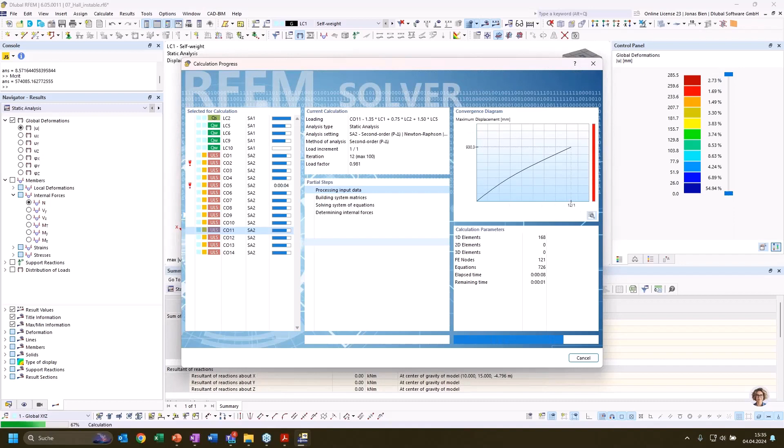That would be the second stage, and it is again not clear that I have no problems with my model, because my load combinations now I solve with, or calculate with second order theory. And I again get only for some load combinations errors that my stiffness matrix is singular and my structure is unstable.

So this message can have two reasons. Either I have done something wrong in my modeling and I've connected, I have disconnected parts, or some DOFs are free and not restrained in my model. Or it could mean that my system is really overloaded because I have now calculated according to second order theory. It could also be that I've reached the critical bifurcation load of my system.

And in order to check this, I would recommend to go to the load combination that is problematic. For example, in this case, load combination 5 or 2, and I can just switch to first order theory and perform a linear stability analysis, just a regular one.

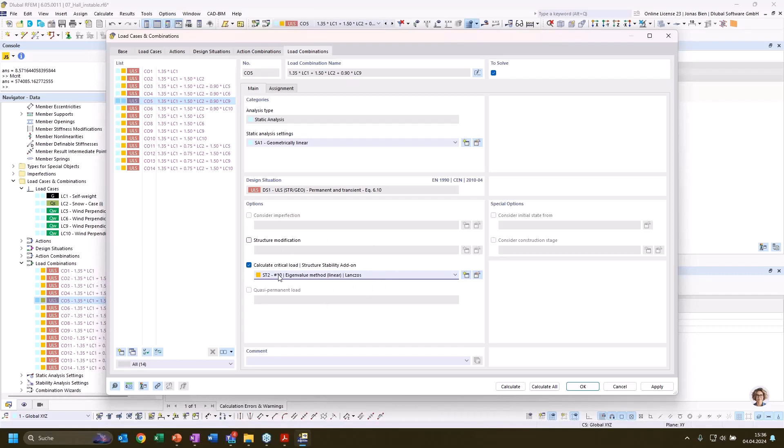Now I just use the second setting where I calculate 10 eigenshapes. Could have taken less because I'm only interested in the first mode shape. And let's go to the results for my load combination 5. And what I can see now is that my critical load factor is below 1.

And that indicates that my structure is indeed unstable because it is overloaded. And I can also check what could be the issue based on the mode shape.

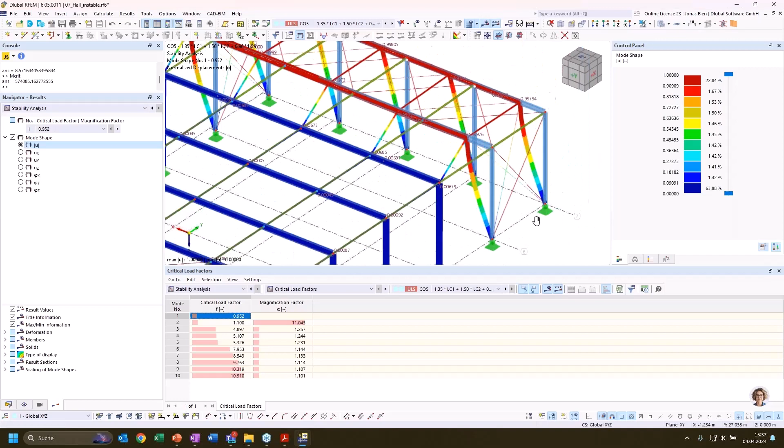And if I now look closely, I see that in my second frame, I set the wrong columns. I set the columns from the end frames, which are much too weak for these internal frames. But this can also be quickly resolved by just copying and overwriting the member dimensions with the columns from frame number 3 or 5.

And if we now again perform the same simulation on our load combination 5, we will hopefully be able to get a suitable solution and a stable model. And now we can see, okay, with our first mode shape or critical load factor, we are above 1 and our model is good to go, and we have good chances that we can properly design the members within our structure.